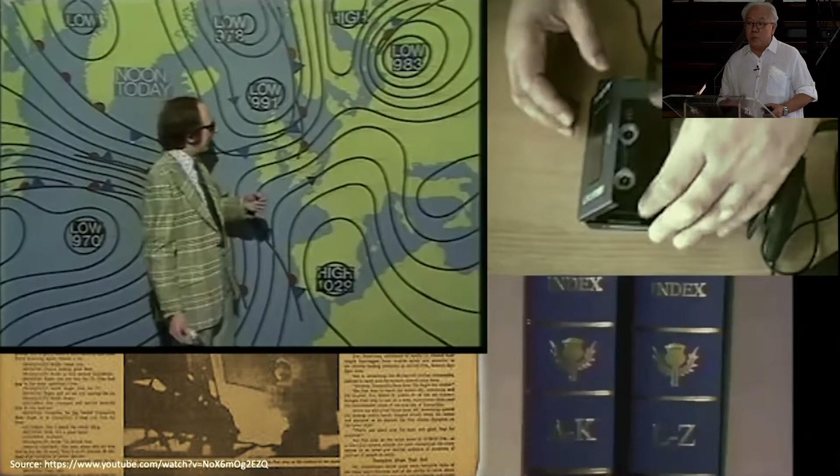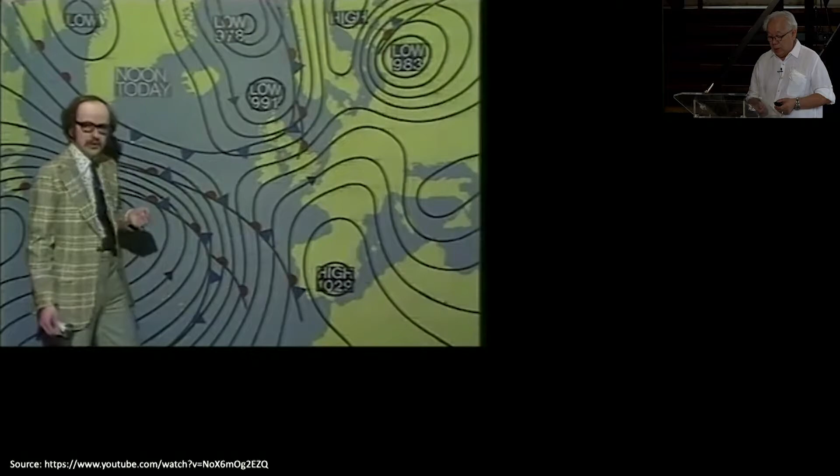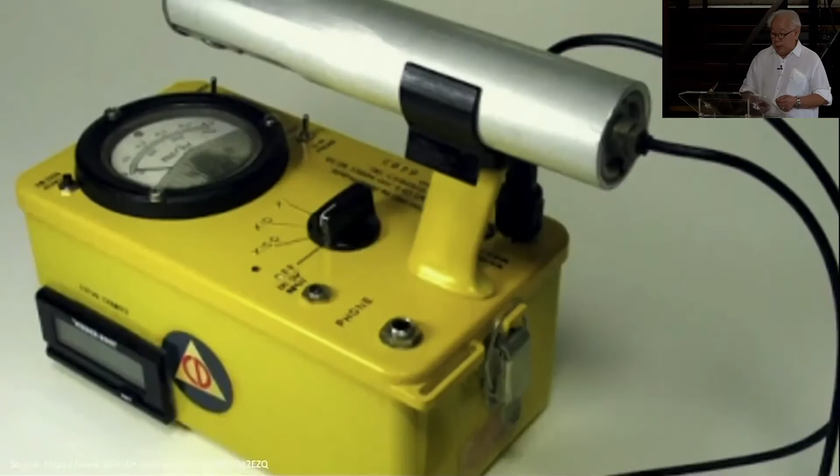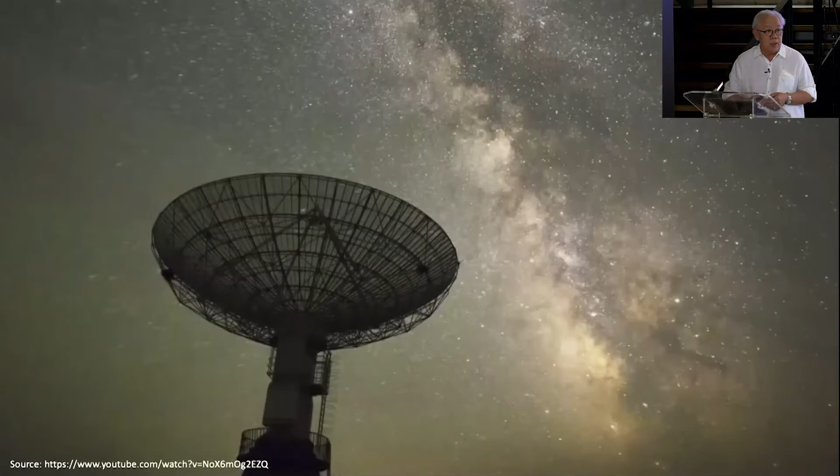We start with aerospace. Man landed on the moon, and today we already send robots to Mars to do scientific work. And in fact, we've been sending probes and telescopes all over the solar system. The first locomotive from 1800 ran less than 16 kilometers per hour. And after a bit more than a century, Japan launched the first bullet train that runs 200 kilometers per hour. Today, China, France, and Germany have the fastest trains. They run more than 500 kilometers per hour.

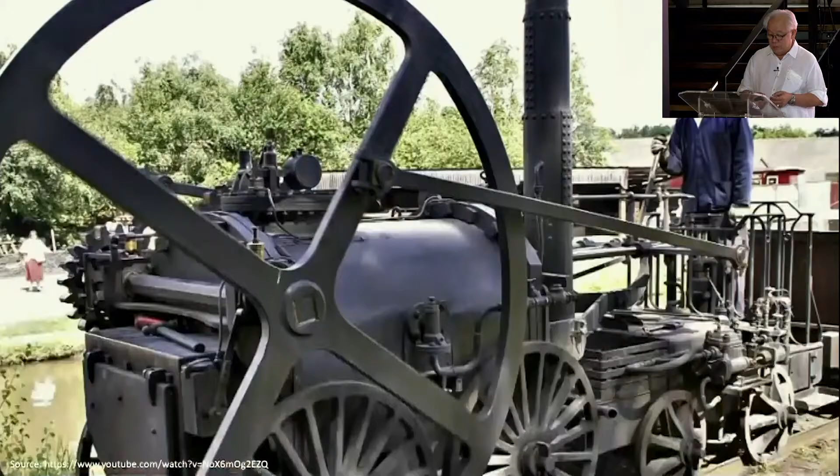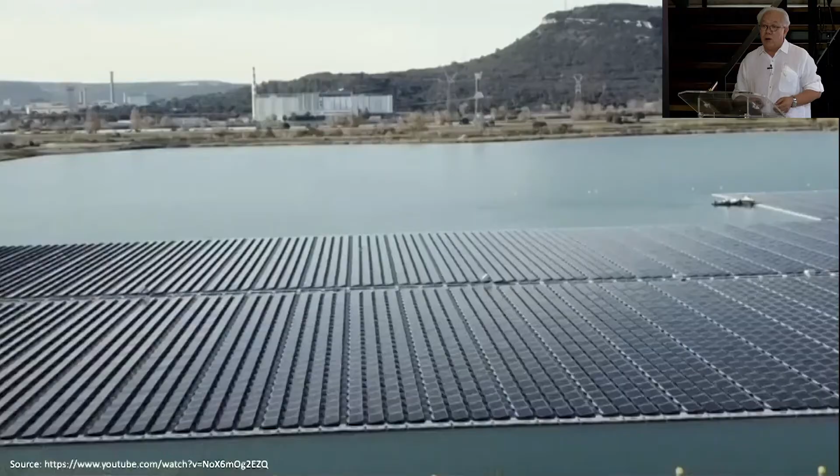Our cars, I can see all your cars parked there. The internal combustion engine, we're going to have trouble with those cars because soon it's going to be obsolete. We have EVs now, so electric cars are coming in, and it is a race of who will produce the best electric cars in the world. So very soon, I think all our cars will be obsolete.

Like energy, we are diversifying our source of energy in place of fossil fuels. We want to use cleaner, renewable, sustainable sources of energy. We tried using nuclear, hydropower, geothermal, wind turbine, and solar. So eventually, all of this is changing very fast.

Communication. There was a time when getting a telephone line was so difficult. You had to apply for years. Since all of you are young, you probably did not experience this. During my younger years, we had this problem. When you got a telephone line, sometimes you had to share it with somebody. So you always negotiated with your party line. Can I use my phone first?

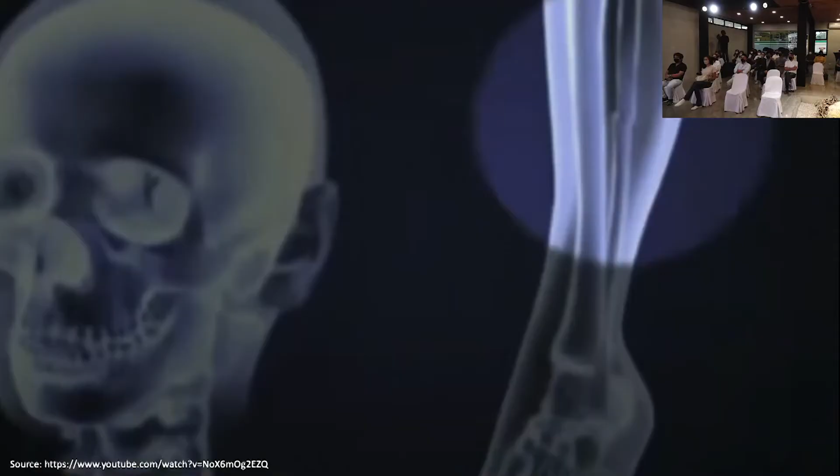So, these things do not happen today. And you probably will not understand what I'm talking about. You have to ask your parents. So today, it is so convenient. Almost everybody has a phone. You call anybody, anywhere, right?

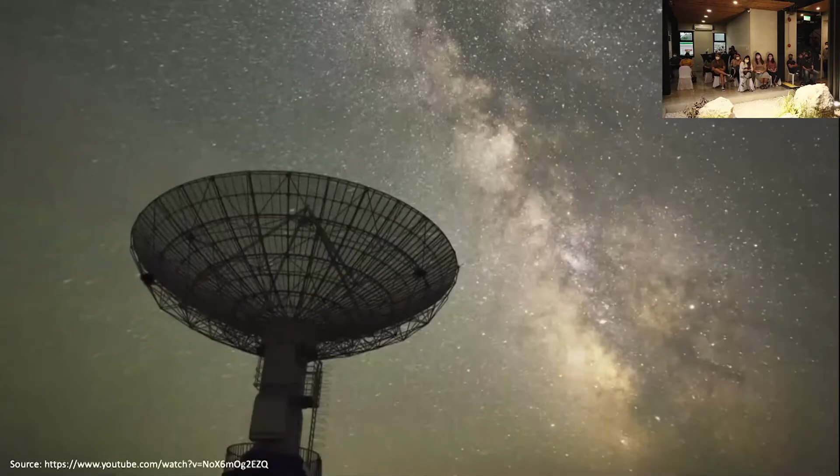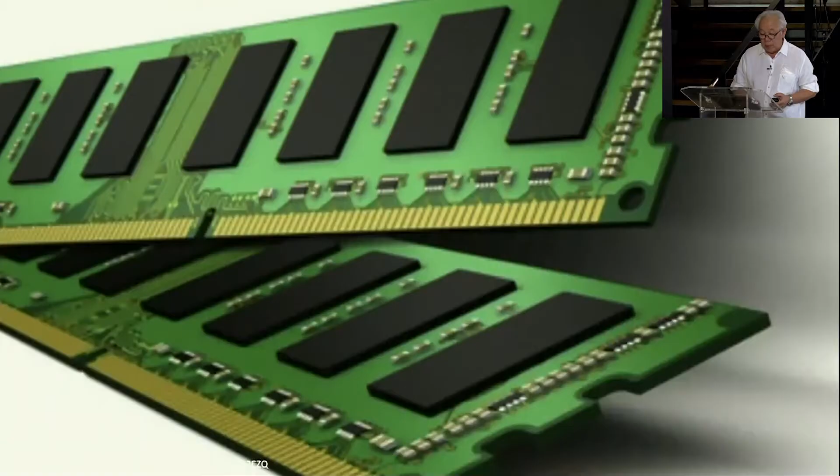Now, probably the most significant thing that happened in the last couple of decades is the internet. With the internet, everything is practically at your fingertips. It has changed our life in so many ways. You get your news, entertainment, your streaming platforms, shopping online, calls and emails, business conferences, telehealth, travel booking and reservations, and most of all, your social media.

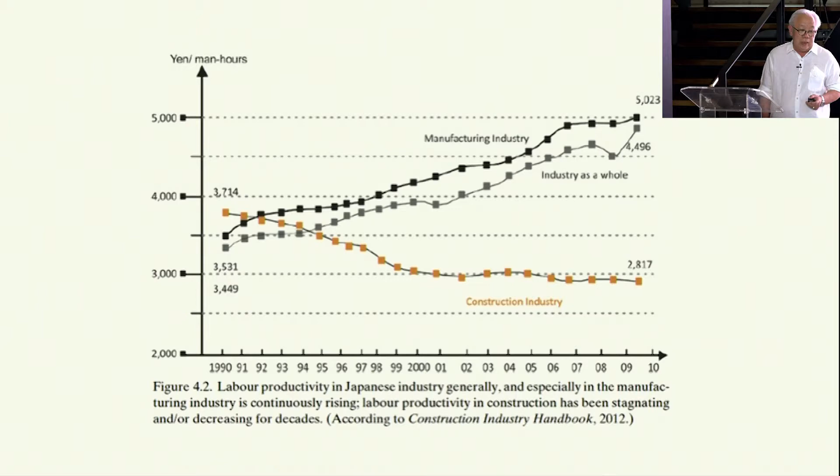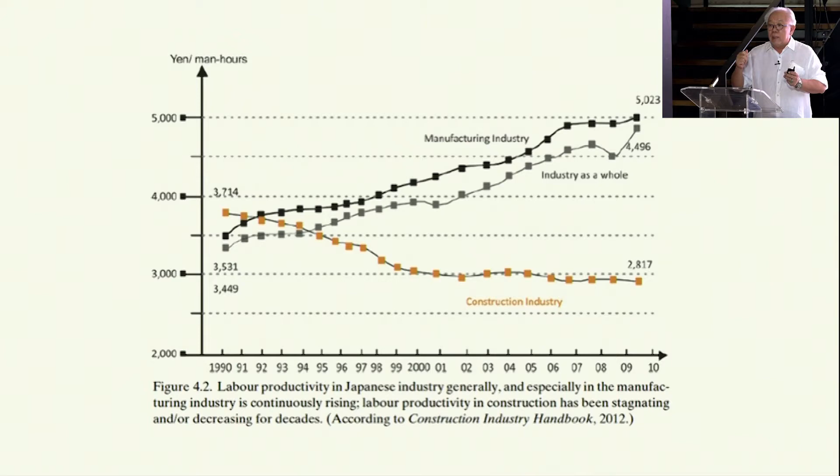There is one industry lagging behind, and that's the construction industry. This is a graph that shows that productivity in almost all industries, especially in manufacturing, is going up. This is a study of the Japanese industry. And what is really lagging behind, and in fact, year after year, is going down, is the construction industry.

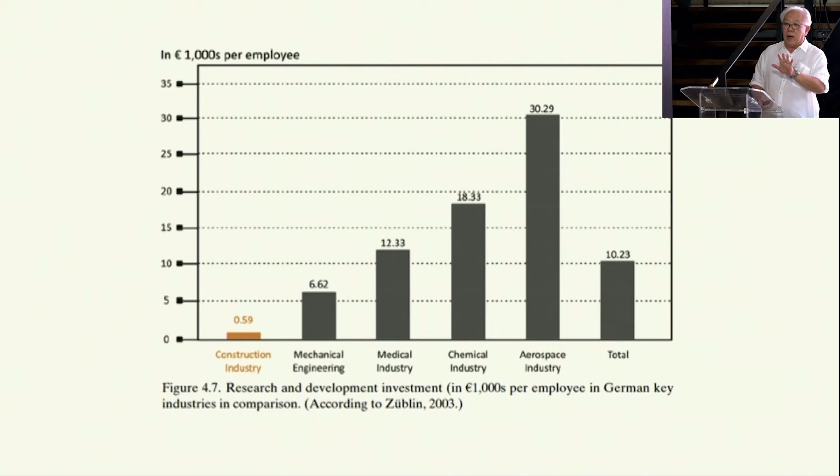Also in Europe, the highest investment in research and development is in aerospace, and again, the construction industry is way down. There is one word that I want everybody to remember. As far as construction is concerned, this is the word: prefabrication.

It actually started. We probably did not just mind it because maybe it was not, I'm not so sure how to say this, but it just happened. But prefabrication is very important as far as construction is concerned. What is prefabrication? It is something you made beforehand, and then you can actually put together very quickly.

Another word that I want to introduce to you is precast. What's precast? This is more important, very important, since we are all using concrete, right? So precast is you pour something before. So why concrete? Concrete is a product highly durable and resilient. It is cost-effective, affordable, versatile, requires very low maintenance. Raw materials are readily available all over, and there's no risk of biotic deterioration.

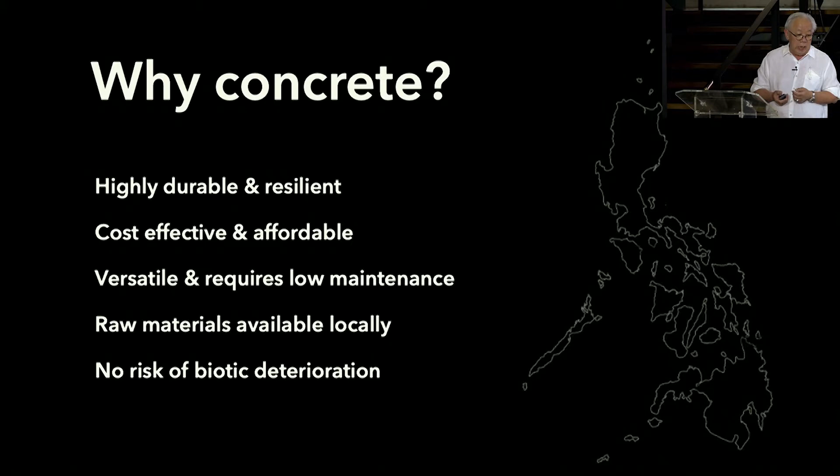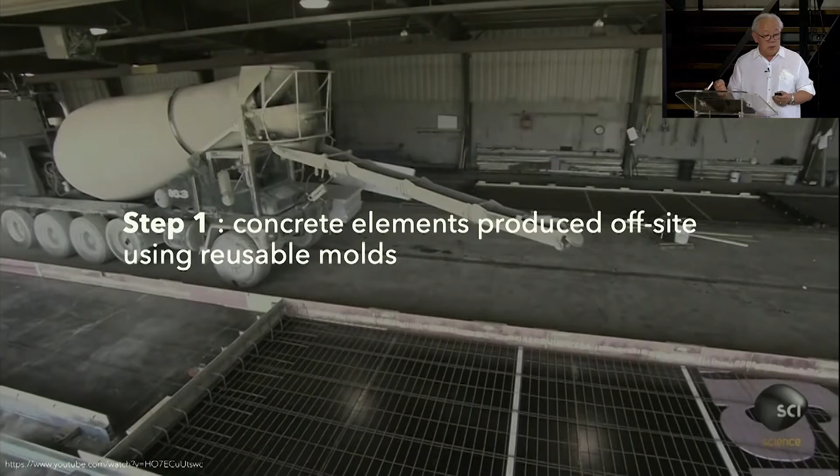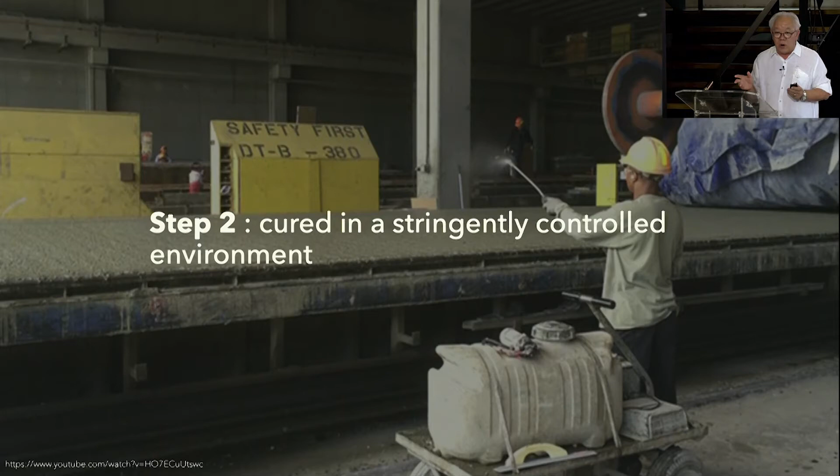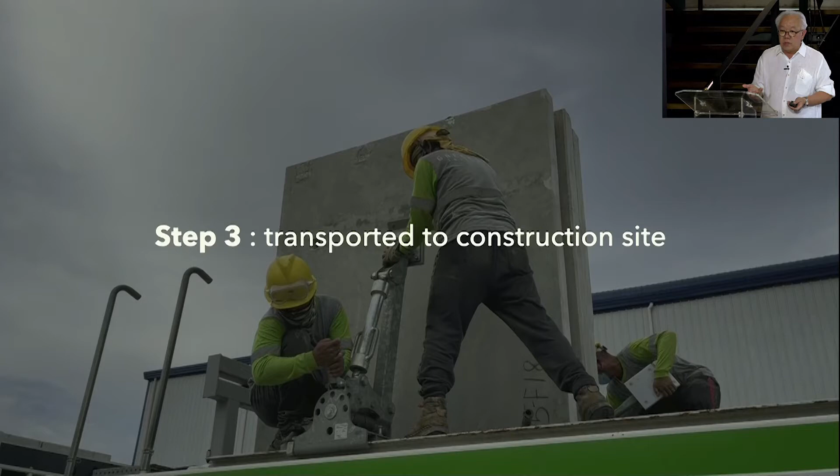Now, allow me to explain the process. There are 4 steps. Step 1, concrete elements are produced off-site using reusable molds. Now, this is important. It is a reusable mold, and you are doing it off-site, meaning not in the construction site. Step 2, you cure the concrete in a controlled environment. So, rain or shine, it's okay. And then, the finished product is transported to the construction site. And finally, you assemble and install in the respective location. That is precast.

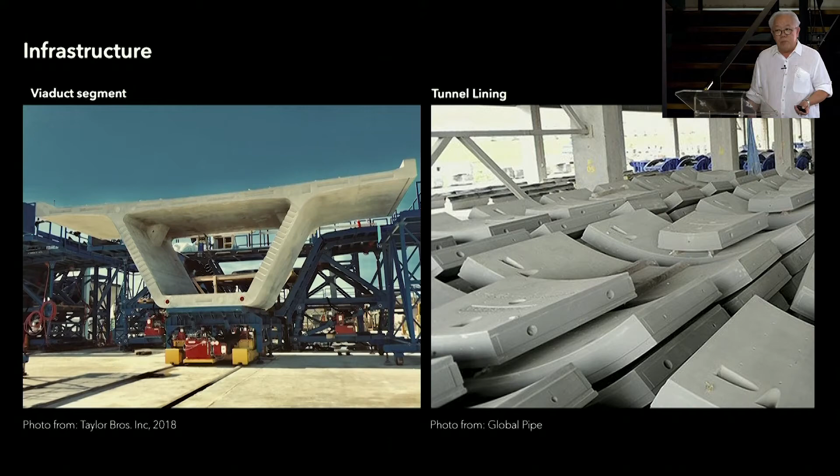Now, where do you use precast? Precast is used in different fields. Infrastructure. These are the things that you see every day. You're just not sure, or you take it for granted. Like the ordinary culvert, that's precast. So you have infrastructure, viaduct, tunnel lining. This is more common outside of the Philippines because here we have very few tunnels. And pipes, retaining wall, trenches, septic tank, seawall, and beams for bridges, curbs and gutter.

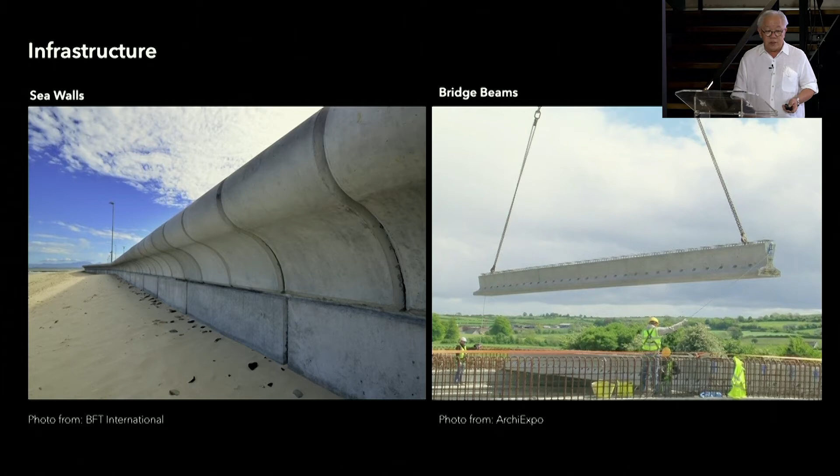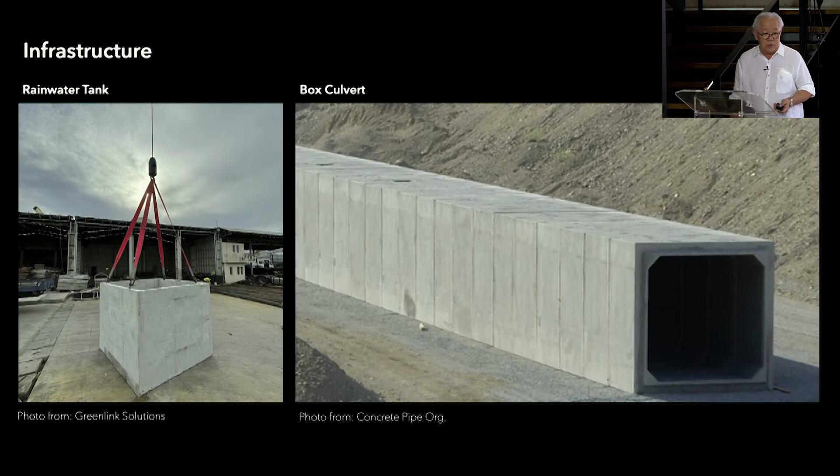We can do that too. It's something you don't need to do manually. And drainage, rainwater tank, which is a requirement now mostly in the Philippines, box culvert, you see that very often. If you go to SRP, it's all over. So that's wave breaker. And sound barrier. Sound barrier is mostly outside of our country. You see that on a highway to reduce the sound.

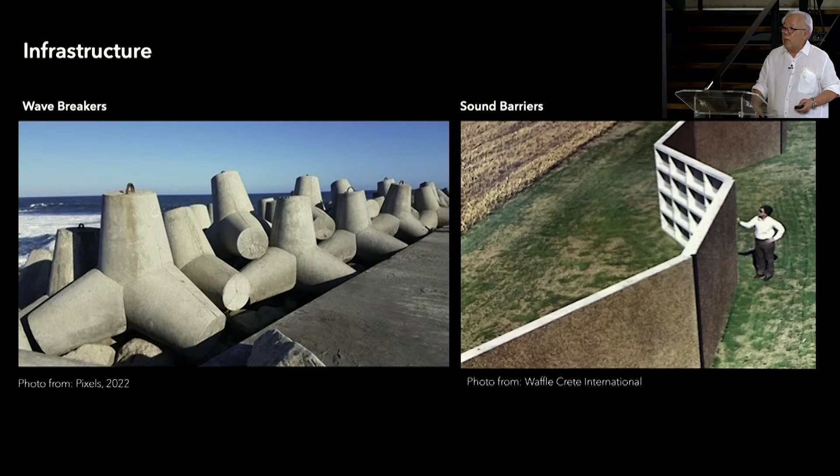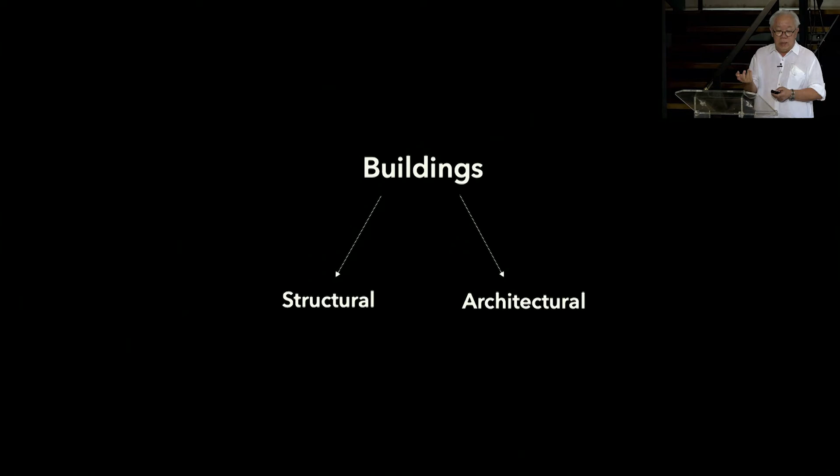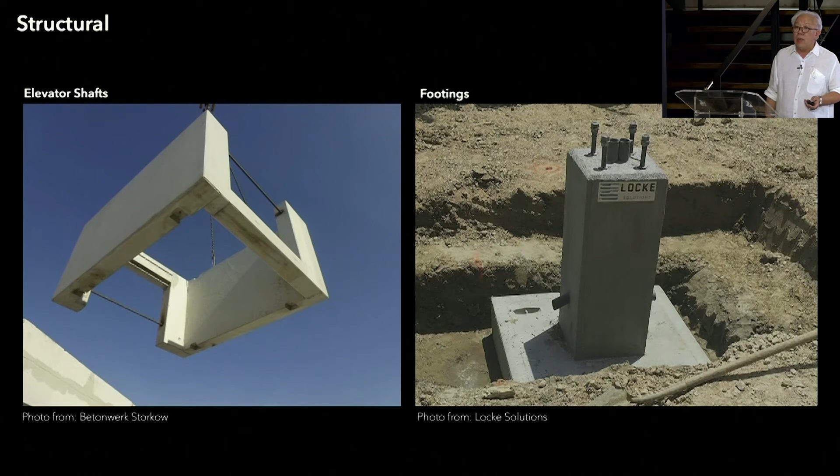Now, aside from infrastructure, you use it in buildings. When you use it in buildings, it is divided into two segments, structural and architectural, right? Now, precast is used for columns, beams, even elevator shafts, and there are times we precast also including the footings. So, precast is also used in slabs. That one is hollow core slab. Hollow core slab is very popular in Europe because this is the type of slab that can span with very few supports, up to 15 meters.

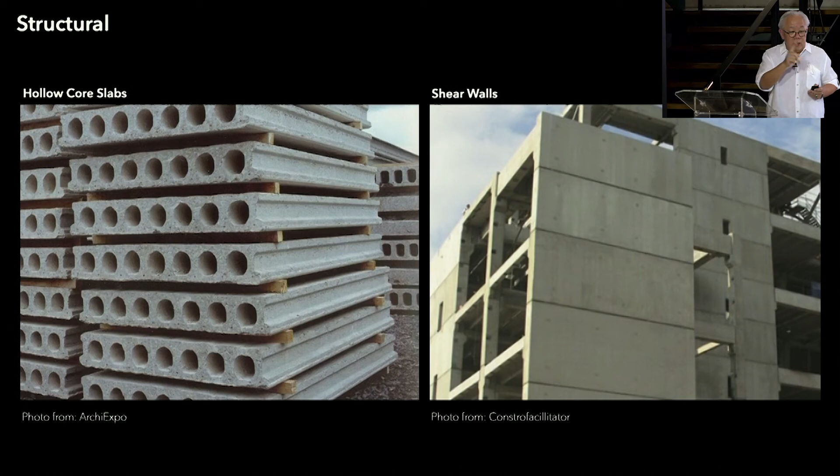And you have the shear wall, that can be precast too, load-bearing wall, stairs, and this is also a type of precast slab, but it is done halfway. You precast one half, and it is delivered on site, and you put additional rebars and pour concrete, okay?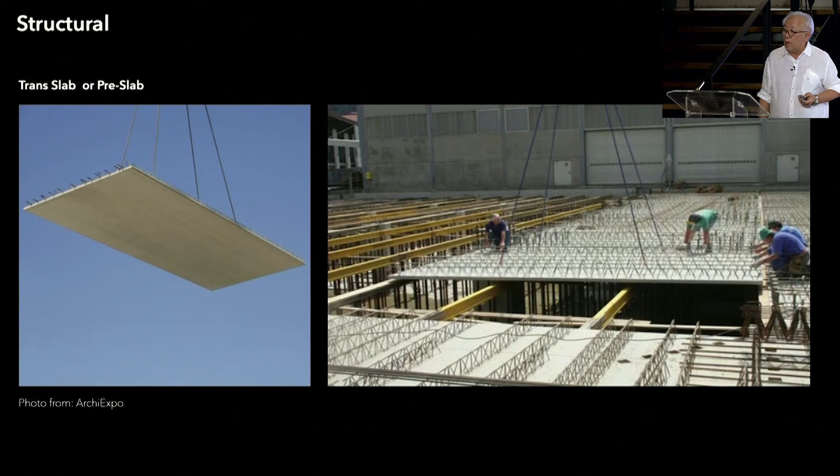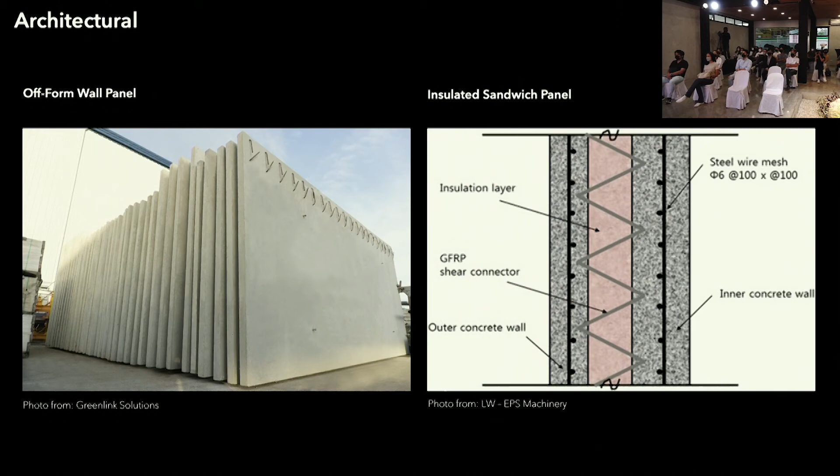Then we will discuss architectural precast. Architectural precast, this is all over Sugbu right now. They use it for cladding, wall cladding on high-rise buildings. So the off-form wall panel is most common. What you see there is just plain, but you can put a window opening or door opening, whatever. It is ready to accept paint.

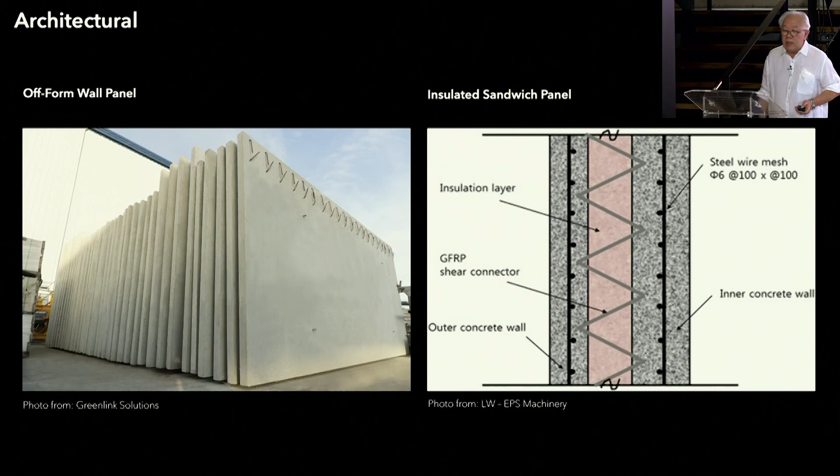And then, not so popular here in the Philippines because we don't want to spend too much on walls, but it is quite popular outside, especially in countries that have extreme weather conditions, meaning when it's cold, it's very cold, and when it's hot, it's hot. So the sandwich panel is an insulated panel that they produce outside. Another popular architectural finish is exposed aggregate.

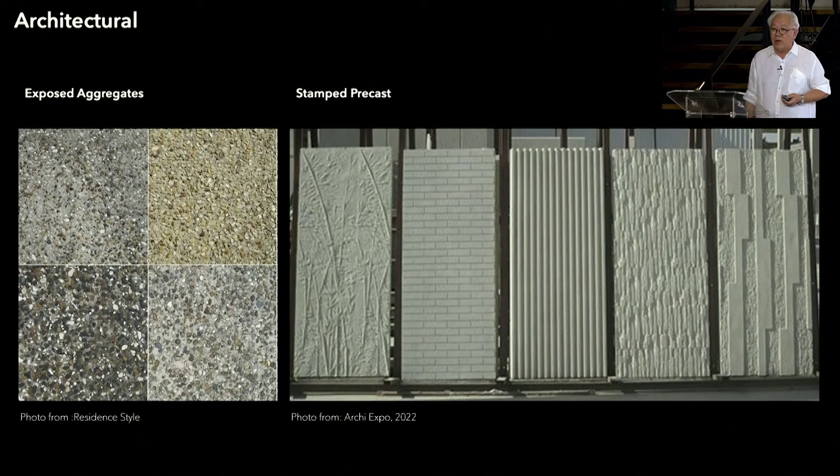We can do that. And then the stamped precast, so you can have anything you like on the surface of the precast. I remember somebody asked me, can you do precast with a wood finish? Yes, we can. Right now, of course, definitely. We've done that already. So another type of facade, different types of facade elements, you can do that.

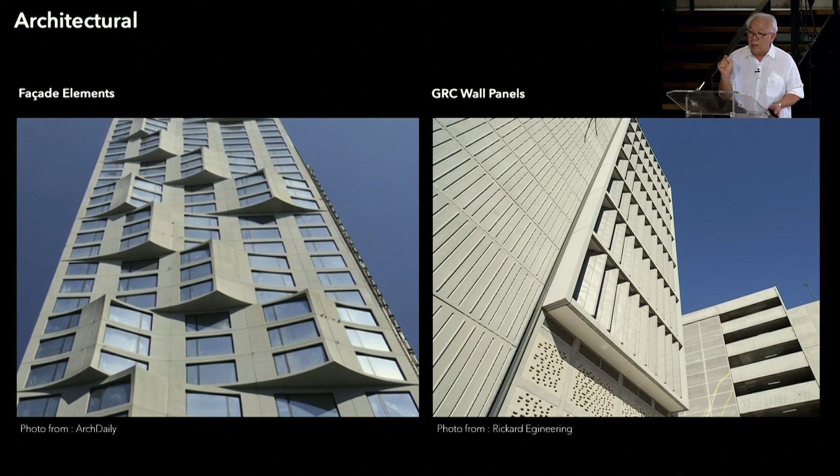So GRC is glass fibre reinforced concrete wall. So you can precast very thinly because of GRC. Or you might want to have a perforated facade. That can be done with precast. And even benches and planters.